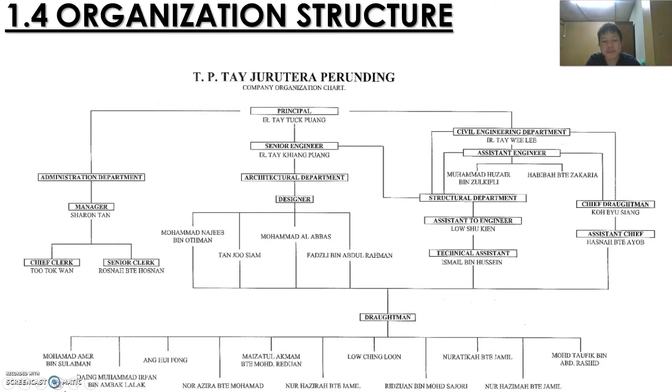Chapter 2, Scope of Industrial Training. The scope of training in this company is to carry out structural design work using Esteem, AutoCAD, and BricsCAD software, and designing layout plans and structural plans for projects such as infrastructure, housing buildings, road blocks, bridges, and others.

Chapter 3, Industrial Content. There were many tasks given by the company involving different work or drawing some plans. Normally, trainees had already trained, learned, and completed some technical skills during this industrial training in the office.

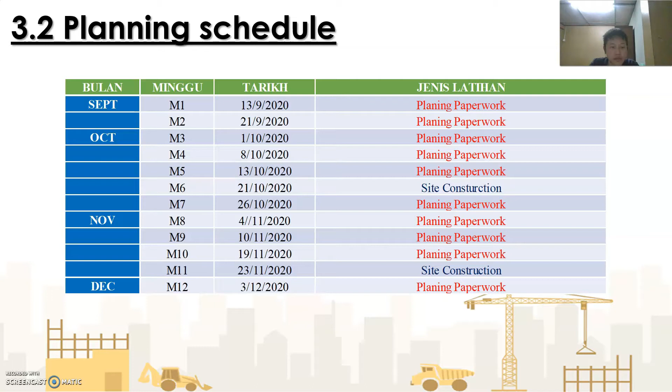This is a table showing the tasks for the training in the company, which can be concluded into planning paperwork and site construction. All this activity progressed from September to December. This is a table listing the planning paperwork and construction tasks.

The first task is the trainee has to check and adjust the beam, slab, and column detail of the building plan, and adjust them to the uniform size. Next, the trainee has to fold the plan into A4 size and combine them into a book.

The trainee has to learn to use Esteem, AutoCAD, and BricsCAD software. These software are used to draw the architecture plan and draw some key plan details.

The trainee also has to do calculations for total pipe length used in the project. Normally the pipe is PVC pipe and mild steel pipe.

Besides, the trainee also has to scan design plans into the office server system, and sometimes they also want the trainee to print out the design plan for submission. All this printing paperwork is progressed in the company's office.

Next is site construction. The trainee has to learn to analyze the plan with the pipe and water supply, and check the actual progress follows the plan. If there is a renewed progress, the trainee has to record the new information of the project into the plan.

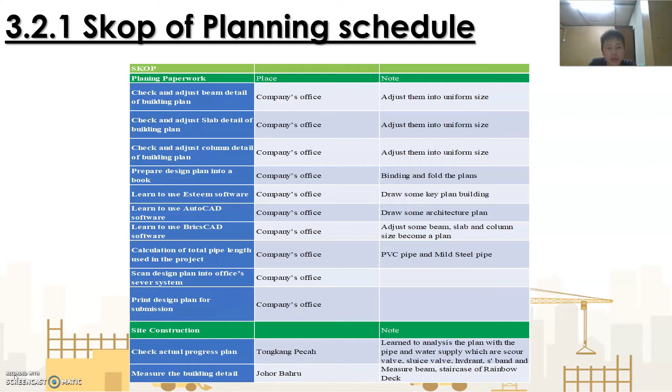The trainee also has to measure the beam, staircase of Rainbow Deck at the Johor Bahru site test. Because the engineer wants to draw the building detail into AutoCAD software, the trainee has to measure out the beam, column, and slab detail.

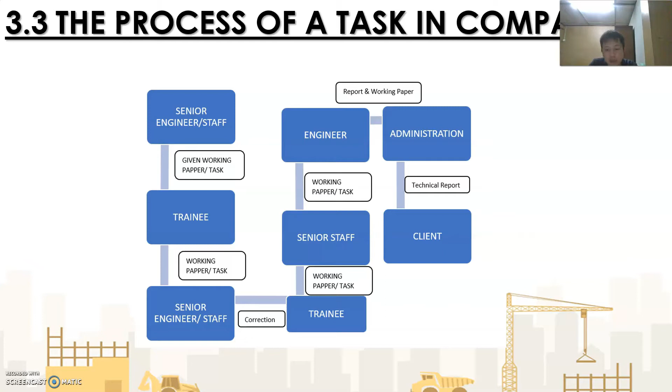This is the progress flow of a task in the company. First, the senior engineer or staff gives the work to the trainee, and the trainee continues to progress the task. After completing the task, the trainee submits it to the senior engineer or staff for correction. If there are no corrections, the senior staff will give the task to the engineer, and the engineer and administrator will prepare the report and working paper and submit it to the clients with the technical report.

Every project has to be drawn into the plan using the CAD software before the program starts. The drafting plan becomes an important part of a project because the plan can be checked by the senior engineer or senior staff to make sure there are no mistakes before the program starts. If the plan has no mistakes found, they will approve the plan and progress to the submission stage.

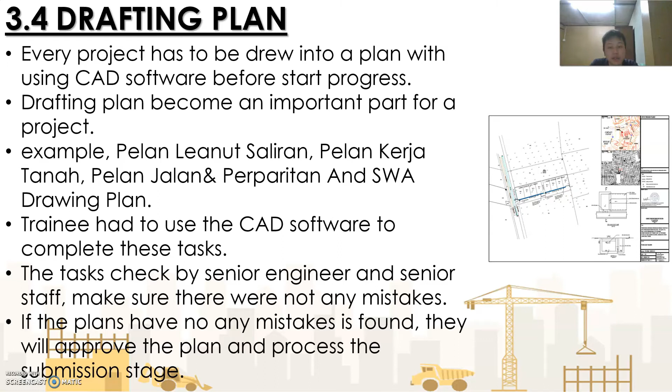There are many plans in the company, for example, pelan leanut saliran, plan kerja tanah, pelan jalan & perparitan, and SWA drawing plan. And this is about the information of Esteem software.

Esteem software product has been in the market since 1994. Esteem is a leading building intelligence modeling software that has been involved in the research, development, and marketing of architecture and structural software products for the building and structural industry.

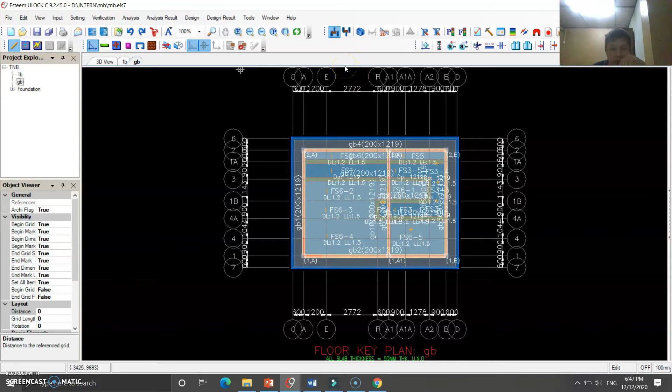This software can create and edit a model, perform analysis, design, and product calculations and drawings through a graphic-driven interface within the Microsoft Windows platform. And now this is Esteem software, and this is a key plan of the ground floor, and this is the key plan of the first floor.

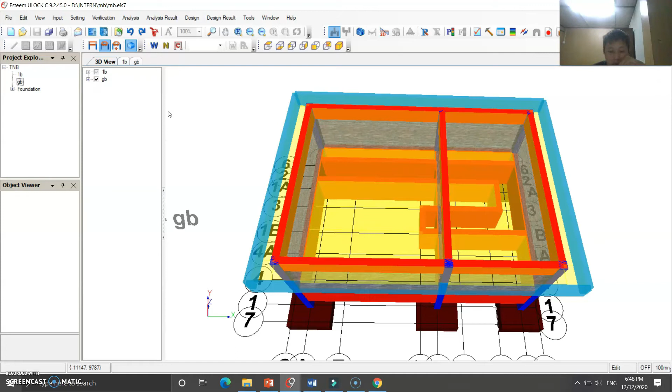This plan is also given by the senior engineer. This building had only one floor and one basement design. The purpose of the basement design is to put the wire inside the building, and this design is a safer place in the building. However, the most difficult part of this design is the basement because the slab always shows errors when designing the building. So it's a big challenge for the trainee to set the slab inside the basement.

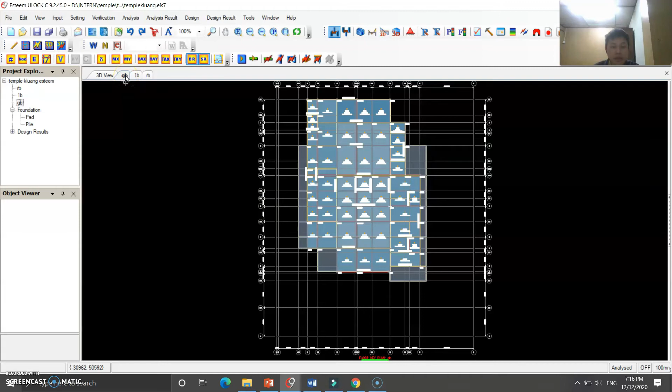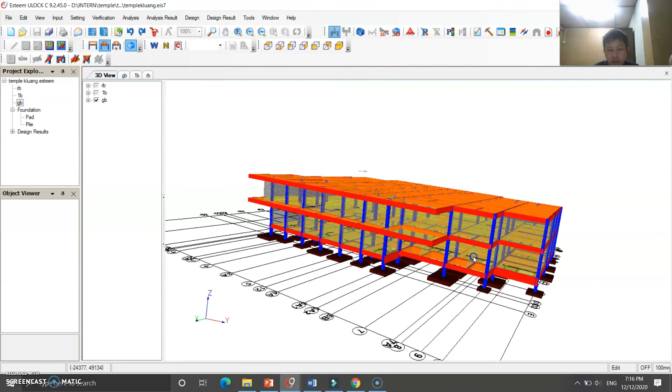The senior engineers gave us the task to draw out the key plan. This is the ground floor, first floor, and the roof floor. And this is a 3D view. This part is very hard to draw out because there is no support, so the trainee has to try to key in the key plan until the calculation is successful.

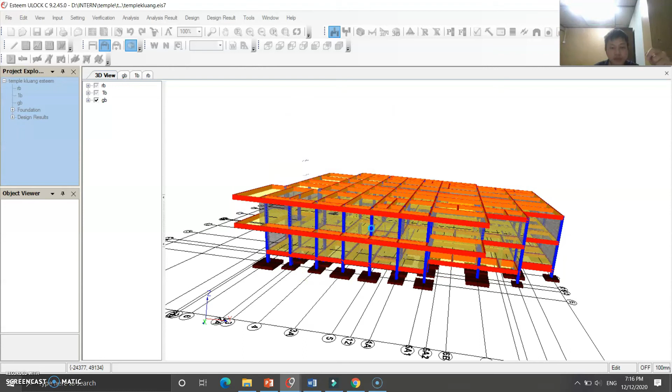This is about the calculations of the existing software. And when the training is successful, the software will give out a response like this.

This task is also progressed during industry training. This task is given by the senior engineer, and the beam, column, and slab had to select the most suitable smallest size and thickness to support the building.

This is very challenging for the trainee because the trainee has to correct the element of the building, as the whole structural building can be affected by an element such as slab, column, or beam. The trainee has to change it until the whole building's calculations are correct.

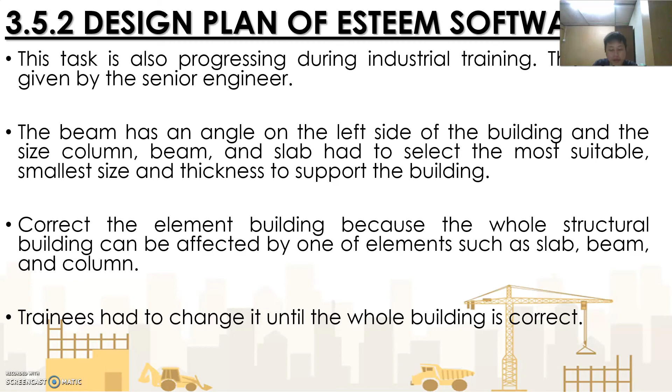This is AutoCAD software 2019, and like other CAD programs, AutoCAD also works on a database of geometric systems including point, line, arc, and so on. The user works on the application through commands, and the drawing is done from the inbuilt command line.

AutoCAD is issued free of cost to students, educators, and institutions. And AutoCAD software is a very user-friendly program for the user.

The plan drawn by the AutoCAD software usually had front, side, and section elevations to lay out the following with the dimensions in the plan. The senior staff also had to check after the plan was drawn by the trainee to make sure the plan was drawn correctly before printing it out and having the plan approved by the engineer. Below are two pictures as an example of a plan drawn by the trainee.

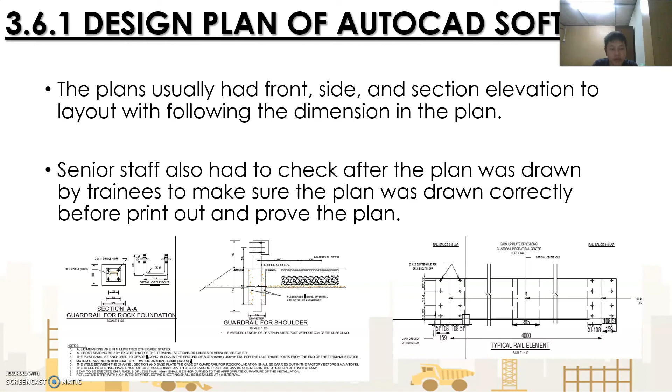And this is about the inspection. The trainee had to go to the site of a one floor house in the residential Bandar Putera Indah Tongkang Pecah. On the way, the senior staff, Mr. Ismail, also taught the trainee to analyze the pipe water supply in the region included in this project. The trainee has to know the water supply progress in a project.

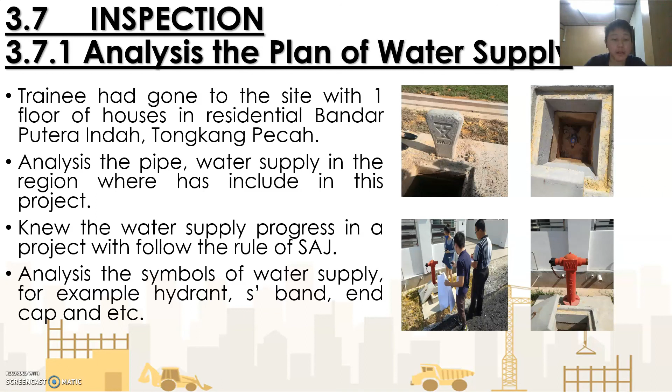We follow the rule of SAJ. Mr. Ismail also taught the trainee to analyze the symbols of water supply, for example, hydrant, S' band, end cap, and so on. So this is a conclusion.

In the conclusion, students have already been given a lot of new experience from practical training and gained some knowledge. So the students realize that they still have a lot of things to learn and experience that cannot be learned in the classroom.

I hope the program will continue for the juniors in the next year because this gives many good experiences for the students and lets them be prepared to face their career in the future. And that's all, thank you to my faculty supervisor for taking the time to listen to my presentation.